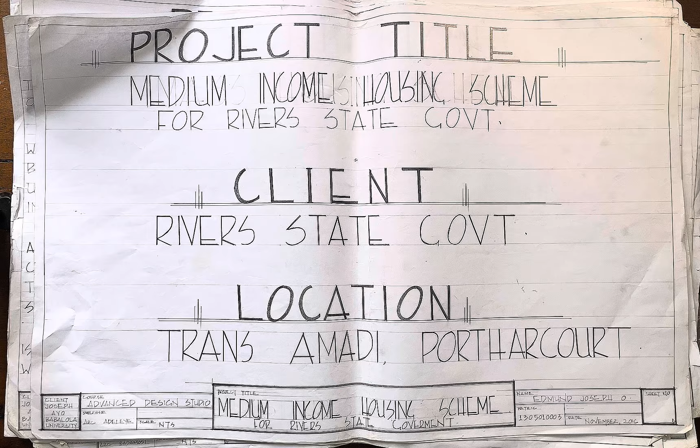Hello everyone. Here's another project of mine done in school. Back then in school, this is a medium income housing scheme for Rivers State government.

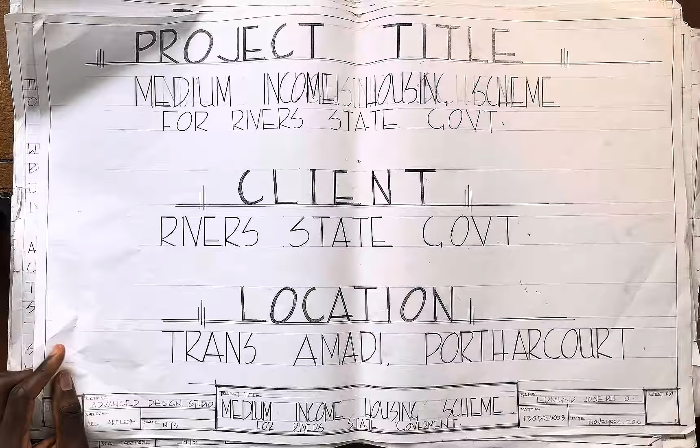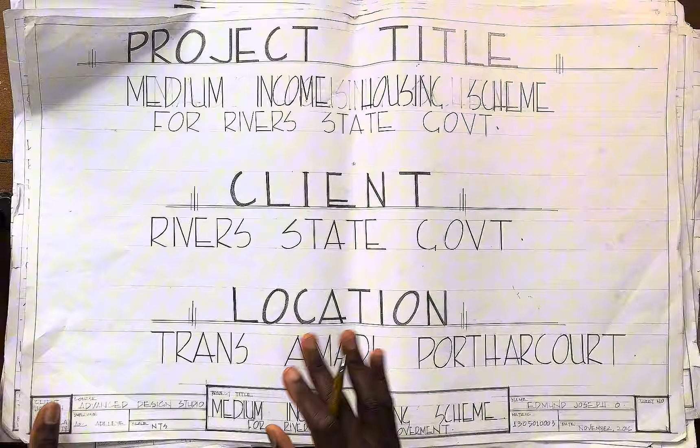Here's just the project title, client and location. There are quite plenty of sheets, so I'm just gonna talk a few words on each sheet. I do like the bold, legible lettering I used.

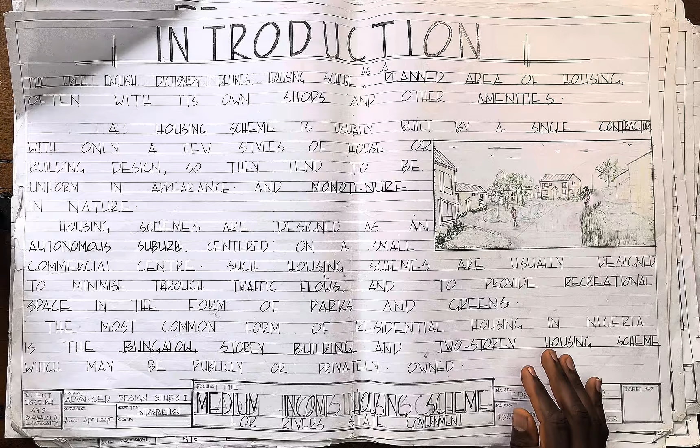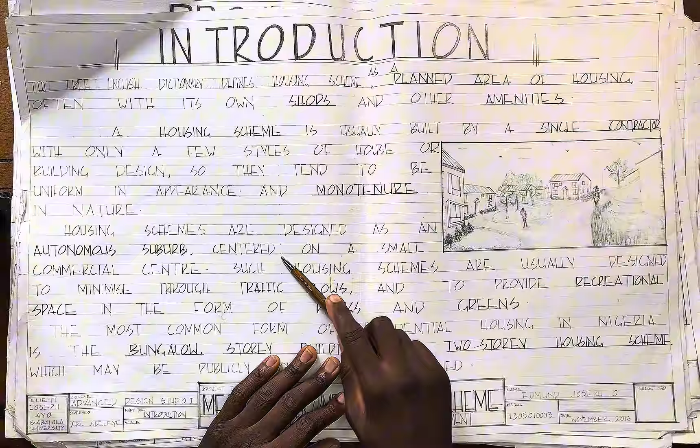Next we have the introduction of a medium income housing scheme. Housing schemes are designed as an autonomous suburb centered on a small commercial center. Here I did a nice sketch of how the housing scheme could look like, with different housing types and footpaths around.

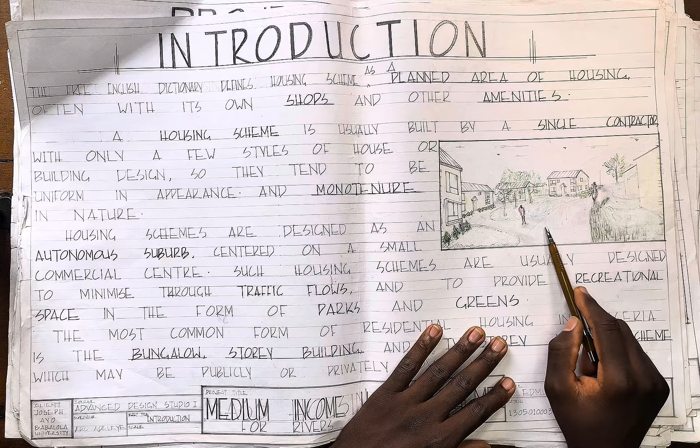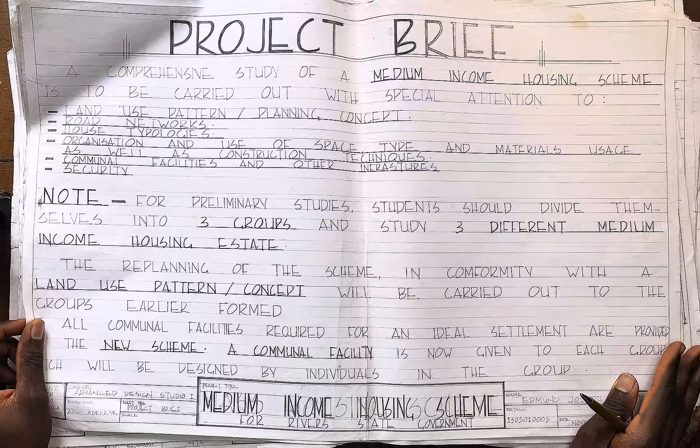And project brief: a comprehensive study of a medium-income housing scheme is to be carried out with special attention to land use pattern, road networks, housing typologies, communal facilities, and other infrastructure security. Here's the project brief.

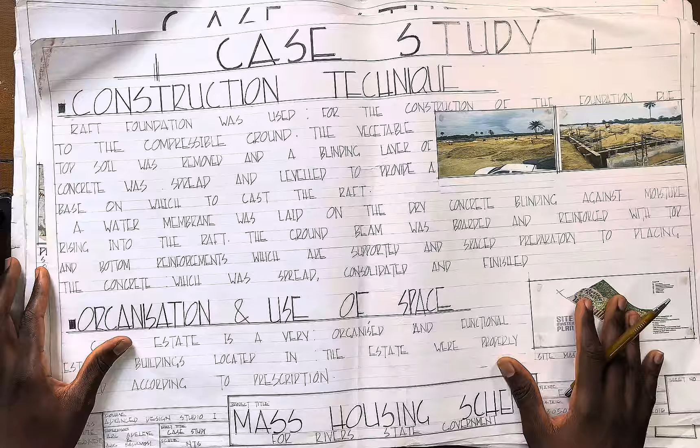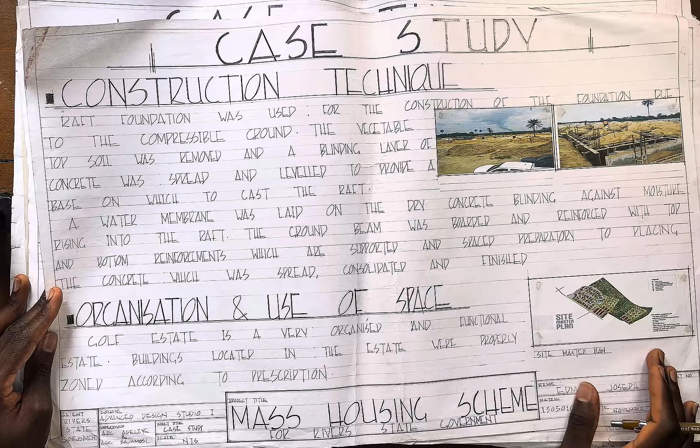I looked at the construction technique - I think it's a raft foundation they used for the construction, and the organization and use of space. They say it's a very well organized and functional estate. Buildings located in the estate were properly zoned according to prescription.

Images of the Golf Estate, different pictures showing how it looks like.

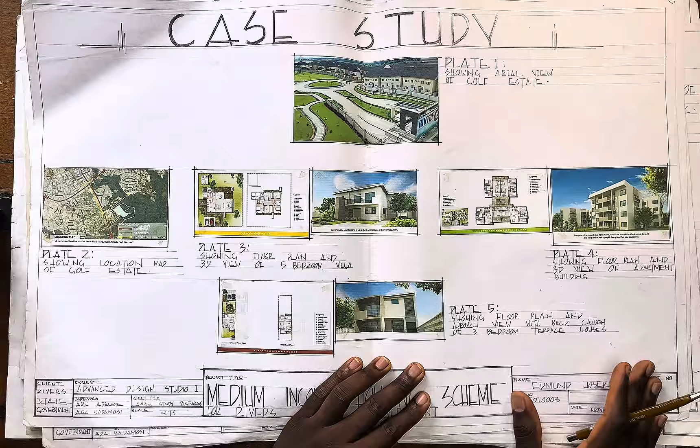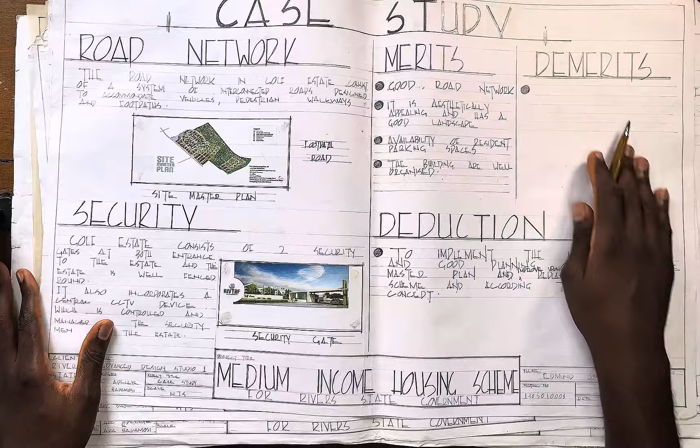Also looked at the road network and got some merits - I think it was a good road network, aesthetically appealing with good landscape. These were some merits I wanted to implement in my own design.

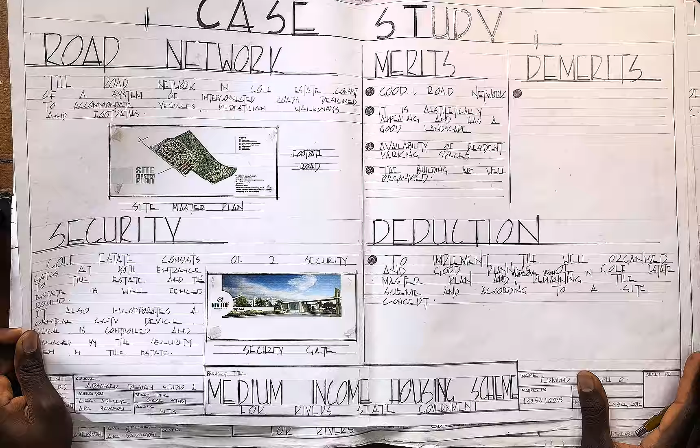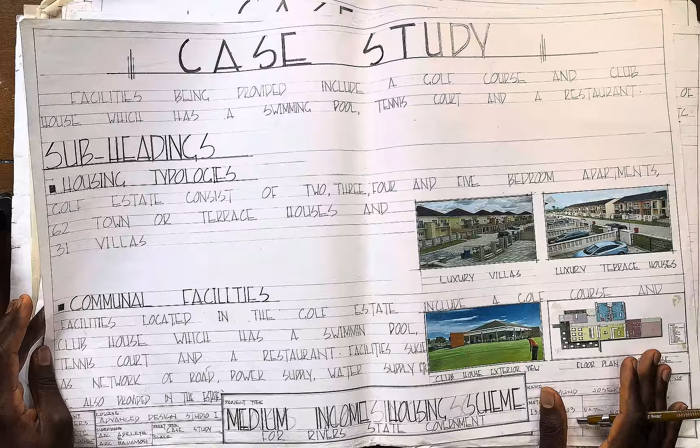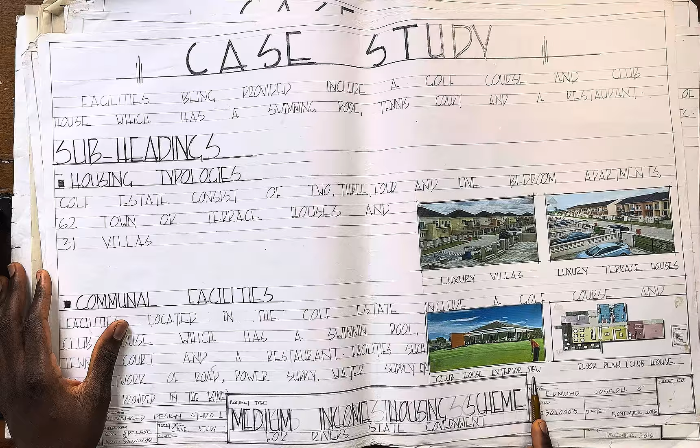Also looked at housing typologies and communal facilities. You can see some luxury villas in the estate, luxury terrace houses, clubhouse exterior view, and floor plan of the clubhouse.

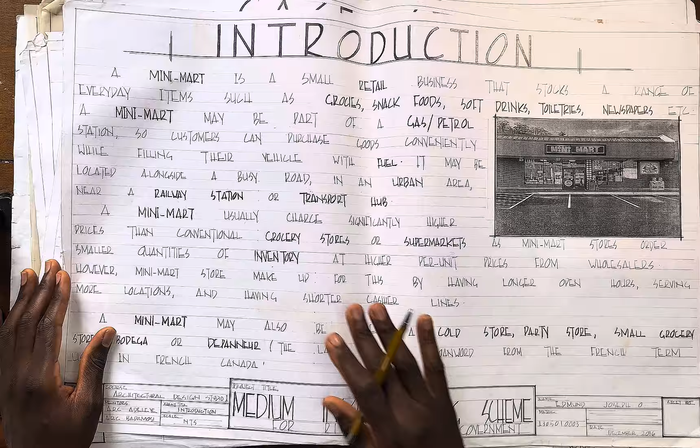And then I zoomed into the mini-mart, which I wanted to design for the Golf Estate - just a brief introduction of what is a mini mart, what it entails.

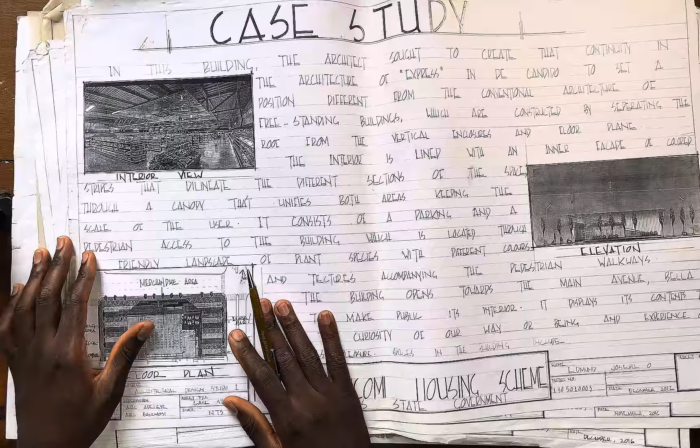Merits: a good site layout, functional design. Deductions: to implement the functional arrangements of spaces in my design.

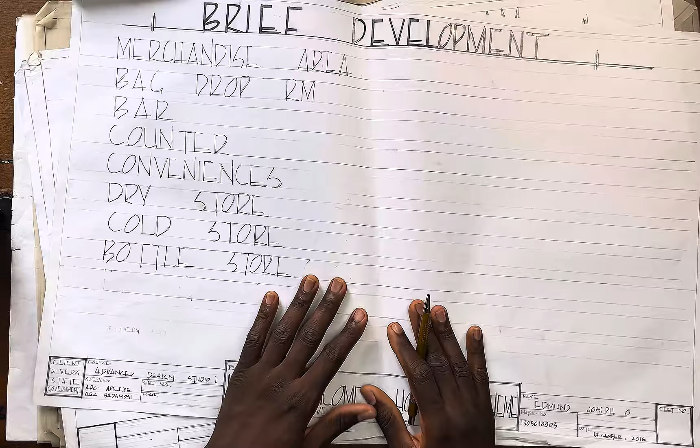Then I deduced some brief development from my case studies. They had the merchandise area, bag drop room, bar, counter, conveniences, dry store, cold store, etc.

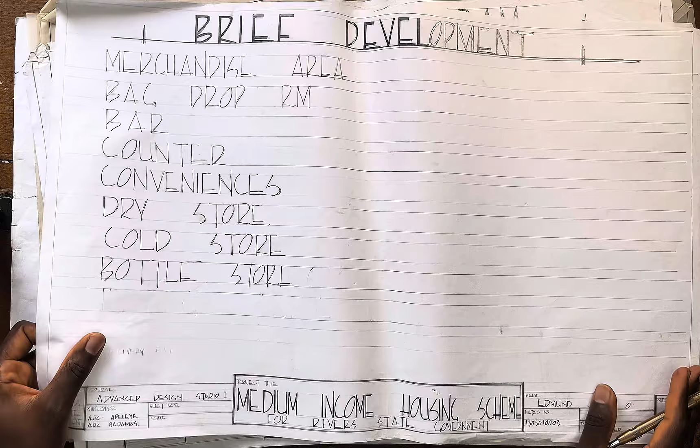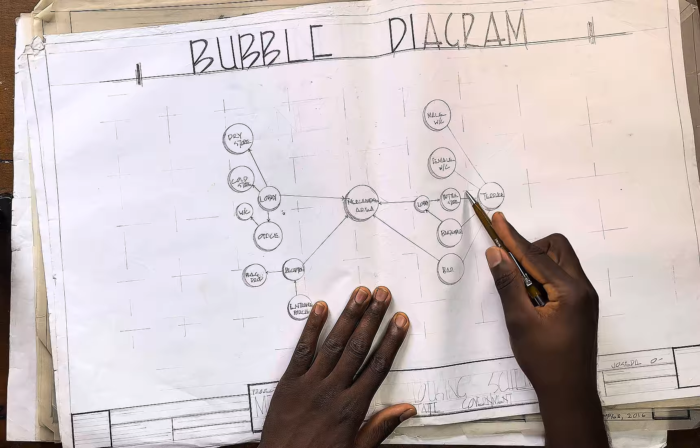And I worked out the bubble diagram of how it's gonna look like - all flows into the merchandise, from the merchandise to the lobby to the store, just like that.

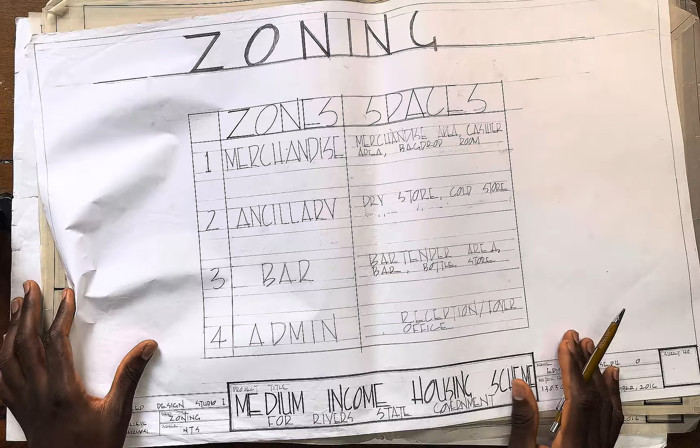And then I zoned the spaces - your merchandise area is composed of the cashier area, bag drop room; ancillary has the dry store, cold store; the bar area has the bartender and the bar area, bottle store; the admin has reception and the foyer.

Here we have a spatial analysis - the length and the breadth of each space, and then the area and the numbers provided.

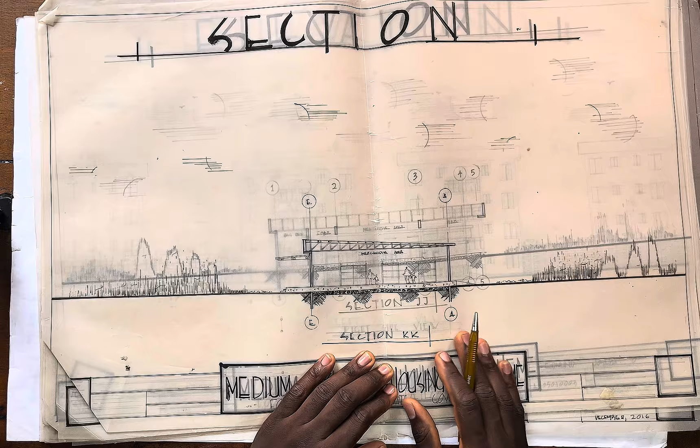Here we have a section of the plan, how it looks like. Beautiful section.

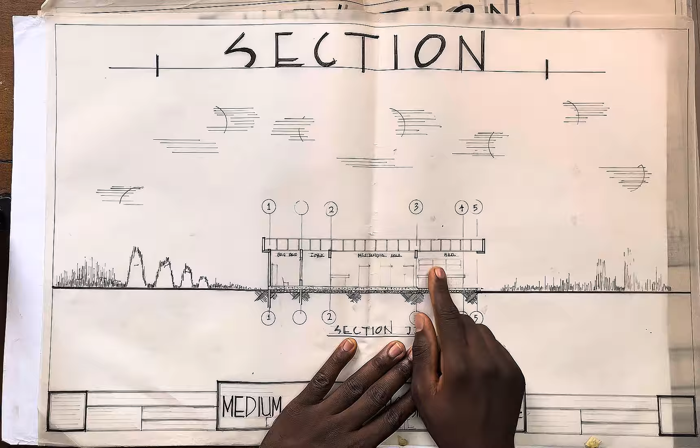I think I should probably put an image under so it's clearer. Here we have another section of the mini mart - you have the bar area, the merchandise area, the foyer, and the backdrop.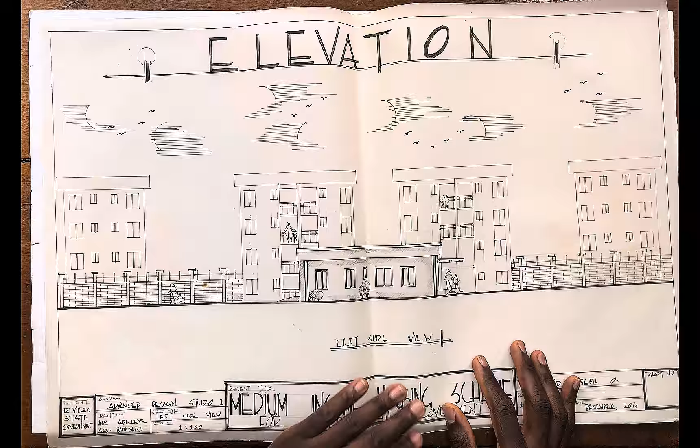Nice elevation, nice rendering. I don't want the video to be long, so I'm just gonna run through the sheets. Next up we have the rear view - I really love the rendering I did here.

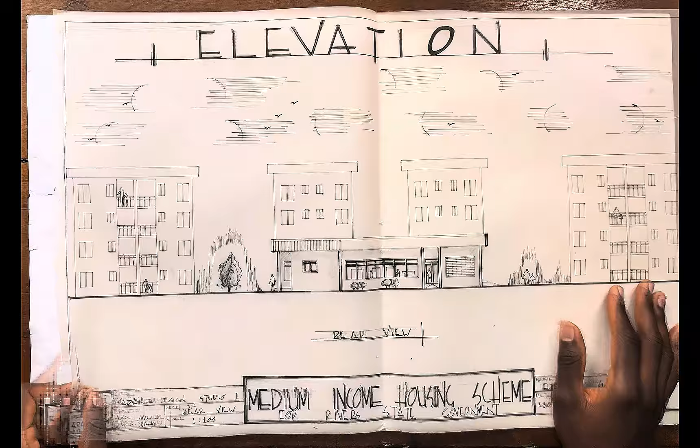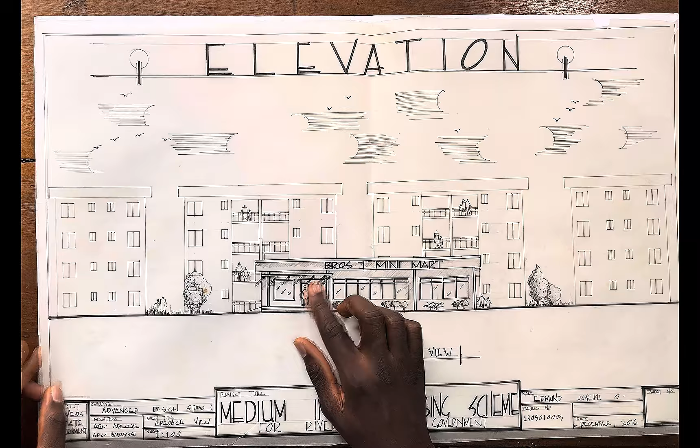Here we have another elevation, I named it Bros J Mini Mart. Here's the approach view when you enter from here - you can see a nice elevation. It's cool, and see this hatching here? These are like shading for the sun.

Here we have the roof plan. It's quite cool, I love the rendering beside the roof plan.

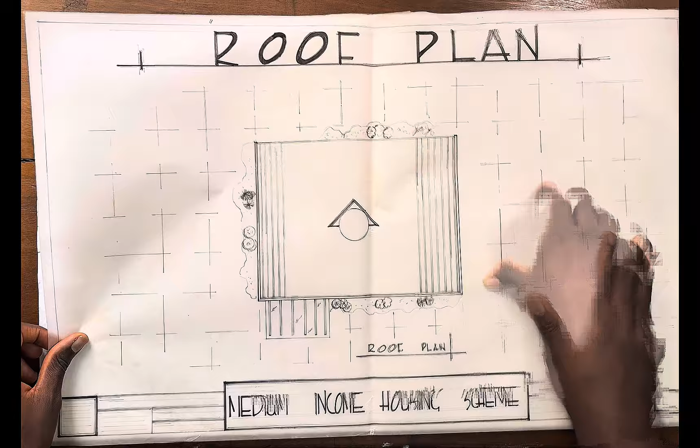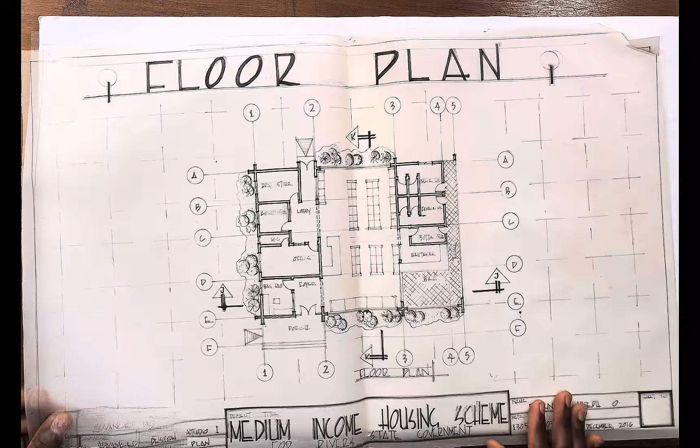Here's the almighty floor plan, which has the foyer, the backdrop, the offices, bottle store, the female WC, the dry store, and a nice merchandise area.

Here we have the proposed building - I think here's the site plan, and these are the parking spaces.

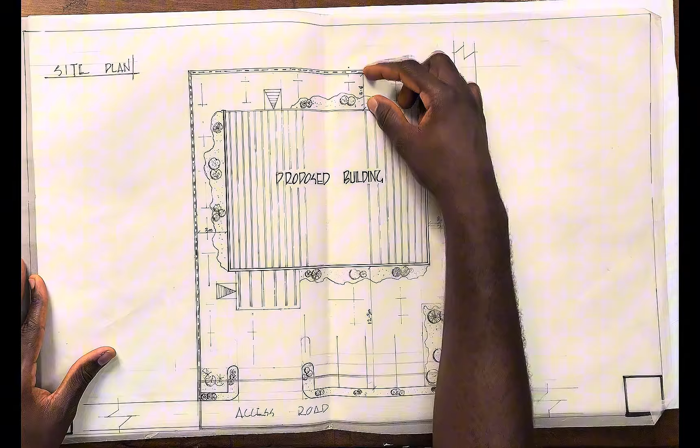I gave a setback of 12.3 meters from the road, and behind I have 3.8 meters setback, and at the sides 3 meters setback. For a public building, you want to make it at least 12 meters, while for a residential, setback should be 6 meters minimum. So that's up to standard.

But I still want to admire the floor plan, I think it was nice. You have this ramp for disabled people, and you have this for undisabled people - people that can walk with their legs.

And you have the porch going to the foyer, which receives whoever is coming. Then you drop your bag before you go and buy what you want. I think it's for reception area.

This should be the cashier's area, where after purchasing you buy, get your items bagged up and you pay over here.

Beside that I have the bar. Then you can also get some drinks, chill around this open area, have a nice view.

You have the bottle store and you have the toilet, and you can access this toilet by coming out to the bar.

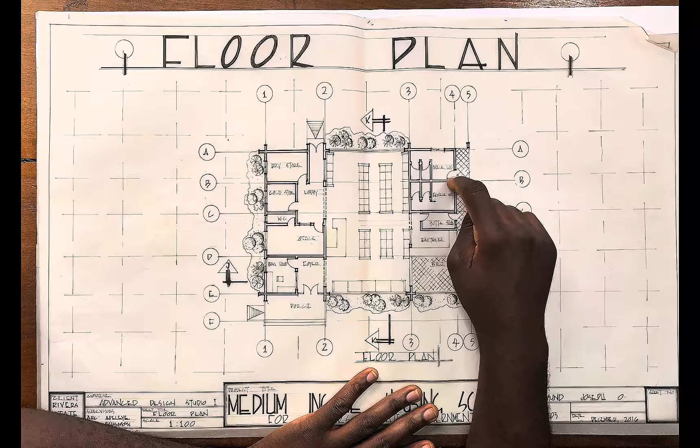They also have the dry store and the cold store. You could bring in foodstuffs from the back, ramp it up, and easily store it at the dry store, cold store.

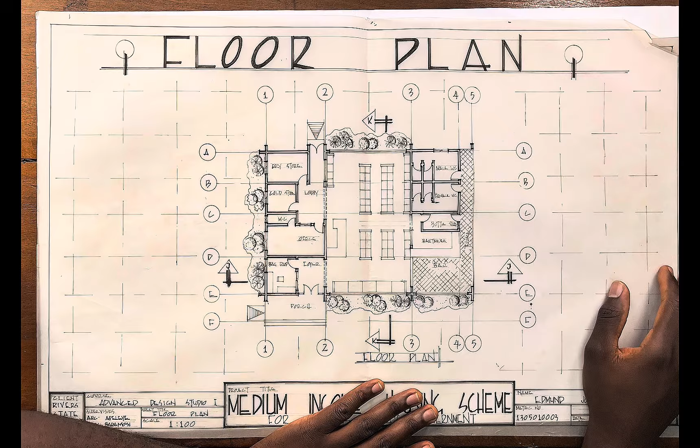Yeah, this is our last sheet for this project.